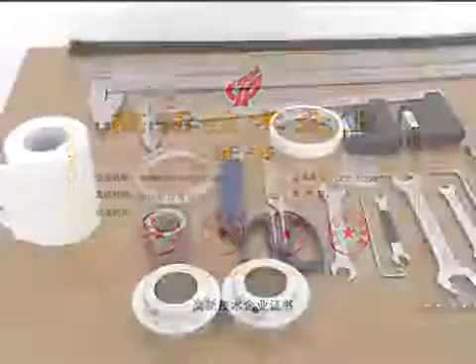This demo contains 3 main parts. Chapter 1, Plotter installation. Chapter 2, Control Center installation and main functions. Chapter 3, After-sale service. Now, we begin from Chapter 1, Plotter installation.

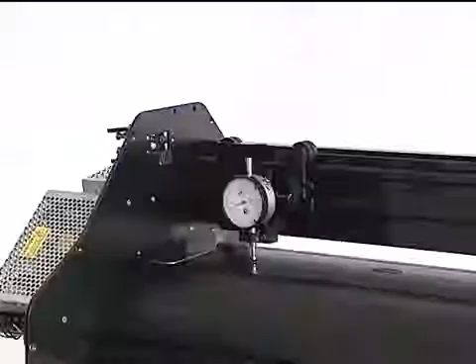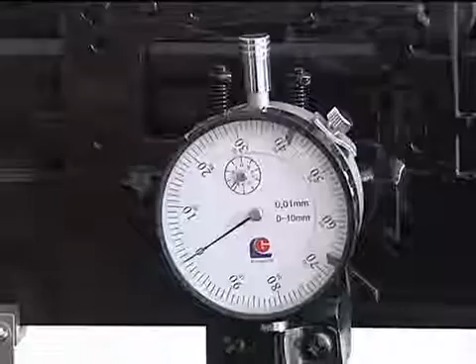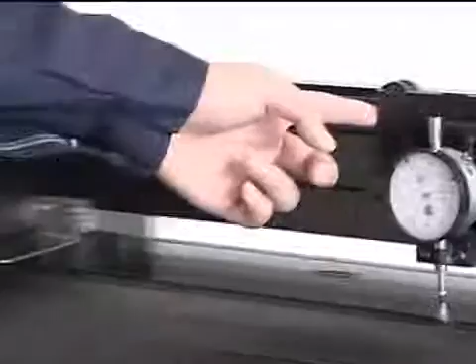Use the calipers to test the parallelism and make sure the bars are in parallel. Take the main beam as reference. The deviation of distance between main beam and take-up bar at both sides should be less than 0.5 mm.

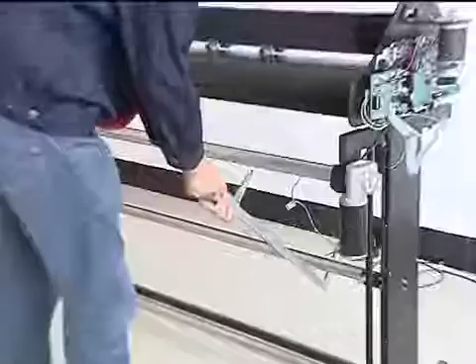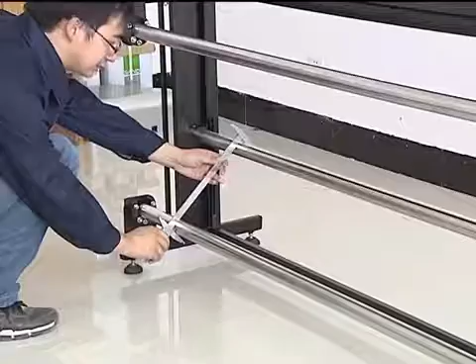Take the take-up bar as reference. The deviation of distance between take-up bar and the connecting bar at both sides should be less than 0.5 mm. Take the connecting bar as reference. The deviation of distance between connecting bar and the feed bar at both sides should be less than 0.5 mm.

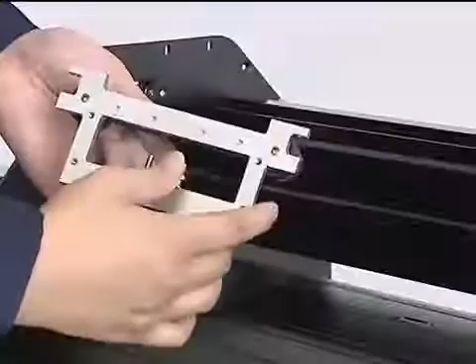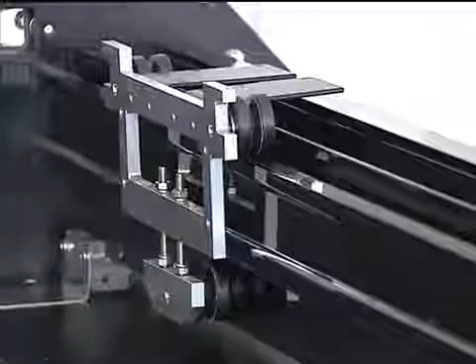Install cartridge device. Install the cable bracket on the cartridge device. Put the cartridge device on the guide. Pinch the up and down ends of cartridge device and tighten the 2 up screw caps.

Adjust the cartridge device. Adjust the 4 screws downwards or upwards to the suitable position. Shake the cartridge device until no big movement. Also use your finger against the wheel and check there is no rotation. Note: this situation means the cartridge device is too loose. This situation means the cartridge device is too tightened.

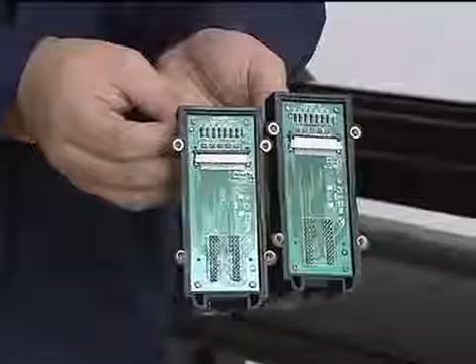Install flat cable. Make sure the flat cable and printhead PCB board is right. Plug the flat cable into the right slot of printhead PCB board.

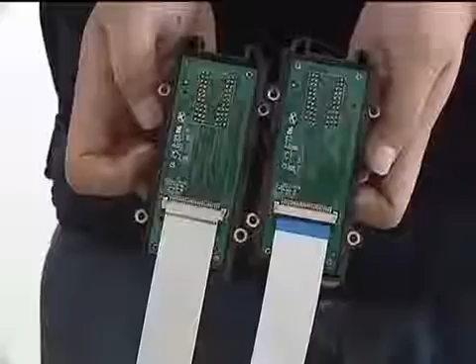Please plug the blue flat cable into the print PCB board A, while plug the white flat cable into the print PCB board B. Printhead PCB board A is in the right position. Printhead PCB board B is in the left position.

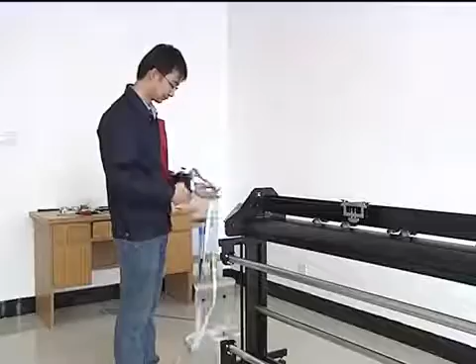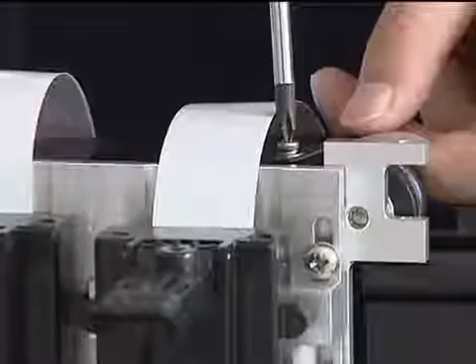Fix the cartridge stand on the connecting board, then fix them on the cartridge device. Fix one side of iron tablet on the bracket and not tighten it at the very beginning. Put the flat cable on the cable board.

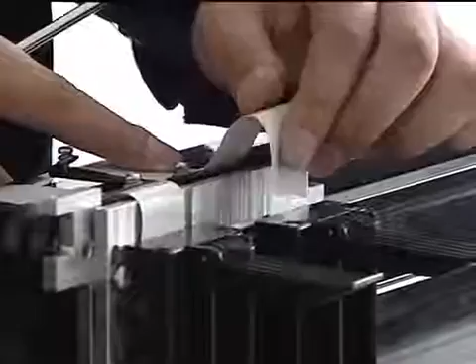Fix the iron tablet and not tighten it. Leave some flat cable to disassemble it when you do after-sale service. Then tighten the iron tablet.

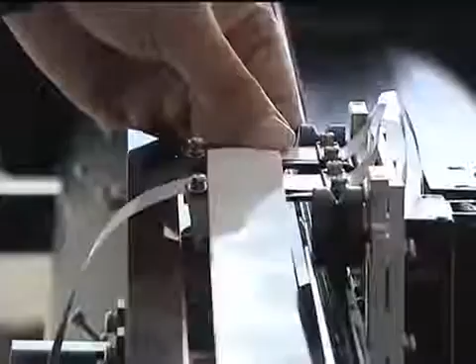Make sure the flat cable is in the middle position of the iron tablet and not crushed by the iron tablet. Fold the flat cable and make sure the flat cable can be put in the middle position of the guide slot, where the grid line is.

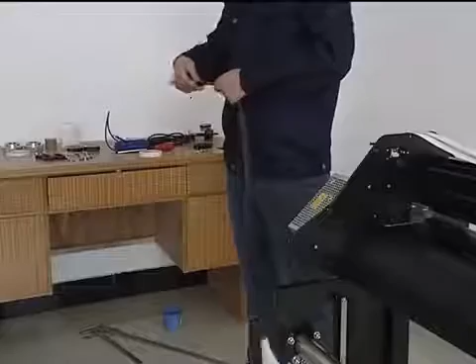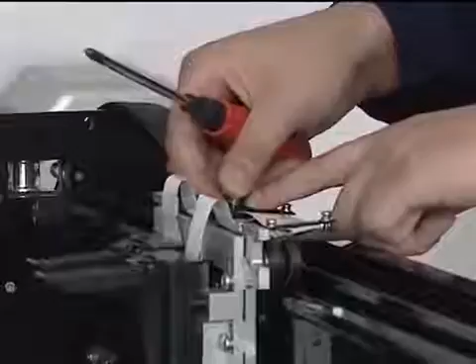Fix on the other iron tablet. Make sure the flat cable should be in parallel with the guide. Then pass the flat cable under the cable board.

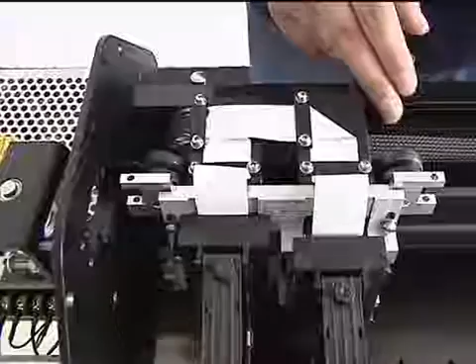Push the cartridge to the leftmost side of the plotter and make sure the cartridge device will not pop up. Stick double-sided adhesive on the guide slot and stick one flat cable on it.

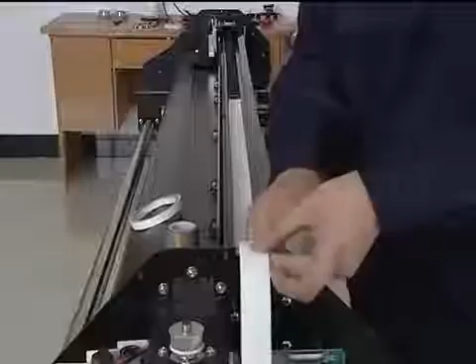The same way to stick the other flat cable. Finally, use a PTFE tape to cover the flat cable.

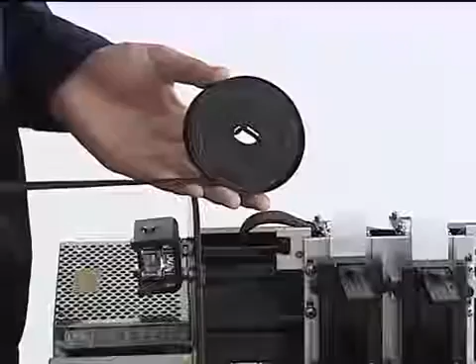Install gear belt. Make sure the gear belt is the right one. Loose the tension device.

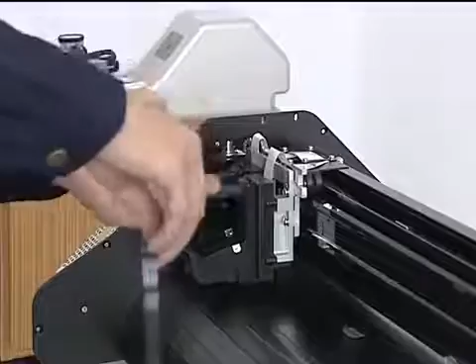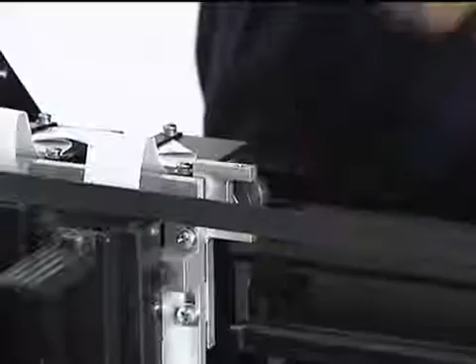Pass from the hole of right plate and Y motor roller. Finally, use the pin roller to fix the other side of gear belt on the cartridge device. Note: make sure the gear belt is not twisted during installation.

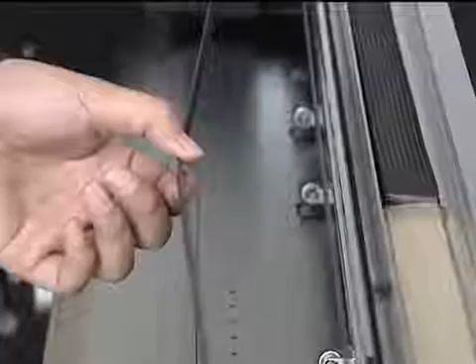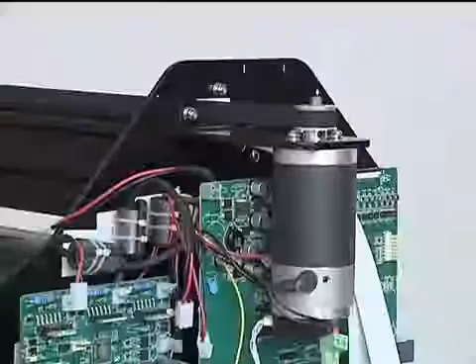Guarantee 3 nuts in the same plane. Pull the gear belt with tension dynamometer and the pull should be 1.5 kg. Finally, tighten the screws. Install the printing PCB board.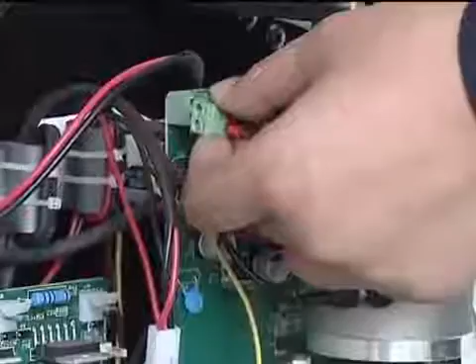Fix the printing PCB board on the plotter. Plug the 15 voltage power socket. Plug the 4-line servo encoder socket. Plug flat cable.

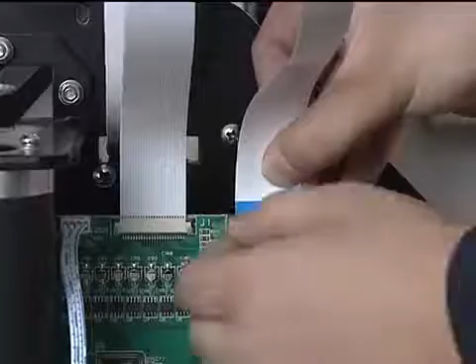Plug 8-line panel cable. Plug 16-line USB cable socket. Install driving PCB board. Fix the driving PCB board on the plotter.

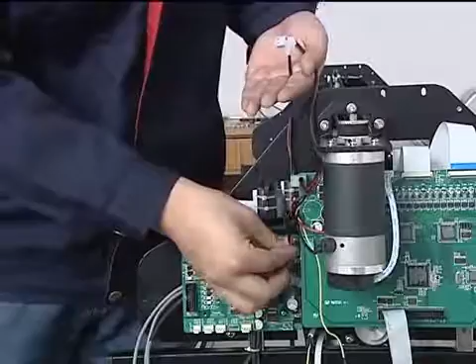Plug the 2-line servo cable. Plug take-up motor 2-line cable socket. Plug feeding motor 2-line cable socket.

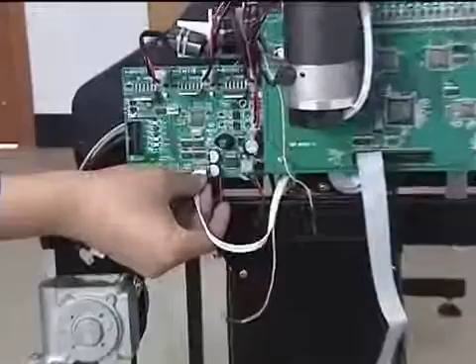Plug sending motor 2-line cable socket. Plug 24 power socket. Plug 4-line speed monitor encoder cable socket. Plug magnetic approaching sensor front.

Plug magnetic approaching sensor down. Plug magnetic approaching sensor up. Plug 16-line USB cable socket.

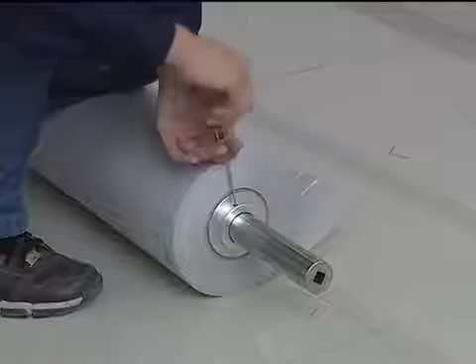Install printing paper. Pass the feeding bar from the paper roll. Make sure the paper roll rotates in counterclockwise direction. Fix the paper roll with paper holder aluminum. Make sure the paper roll is in the middle position of the feeding bar.

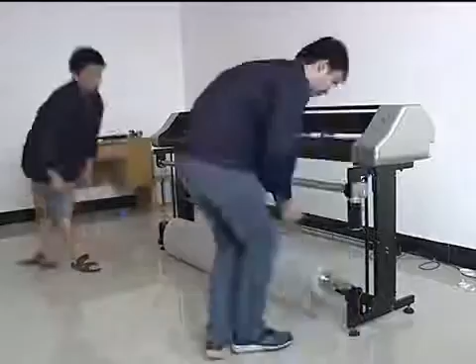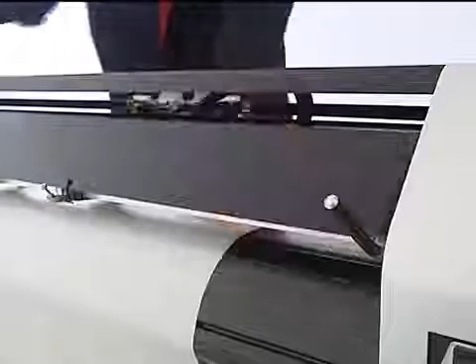Pass the printing paper from the connecting bar and the main beam and put down the handle behind the plotter. Squeeze the printing paper with paper balls at the 2 sides of the plotter.

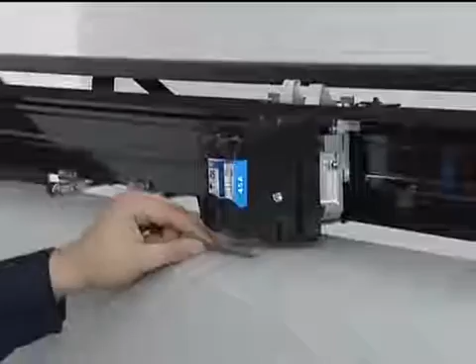Adjust the cartridge stand. The inkjet cartridge was adjusted in the correct position before shipment from our factory, so normally it's not necessary to adjust it again.

However, if you do need to adjust the cartridge device, please loosen the screws and move the cartridge up and down. Keep the distance around 2mm. There is a ruler in our toolbox, and you can use this to test the distance. Note to keep the printhead nozzle surface parallel with the main beam surface while moving the cartridge up and down.

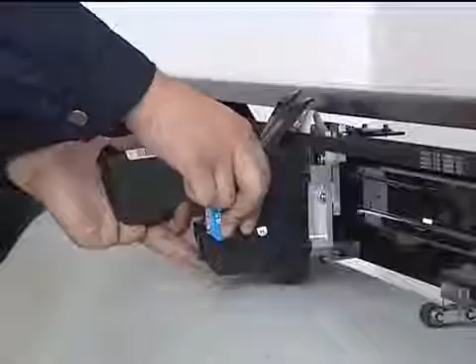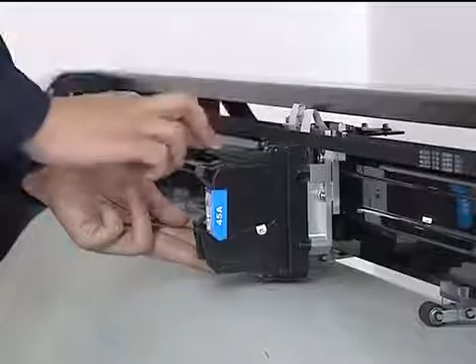Please note the right way to insert cartridges. Turn off the power. Insert the cartridge slowly and gently into the stand and put down the lid. Use the same way to take away the cartridge.

Chapter 2. Control center installation and main functions. First, connect the computer and plotter with a LAN cable. Insert the CD into the drive.

Open and run the dotnetfx.exe file, then install our control center. Follow the plotter setup wizard.

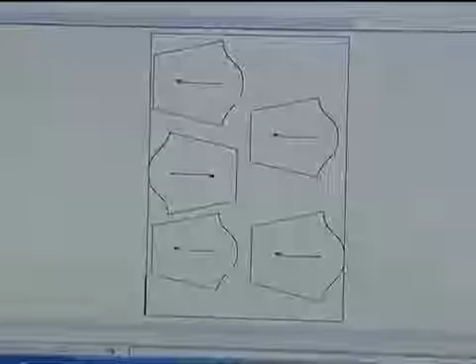Merge: click Merge and then choose some small files. Our control center will arrange these small files together and print them.

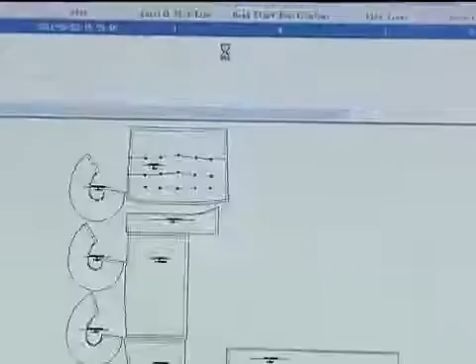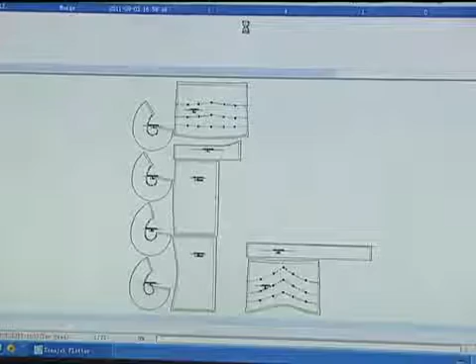Split: for example, the max printing width of the plotter is 165cm, but now you want to print a 1.8 meter file. Then you can use this function. Click Setup, Plot Parameter, Other, File Width, 1.6.

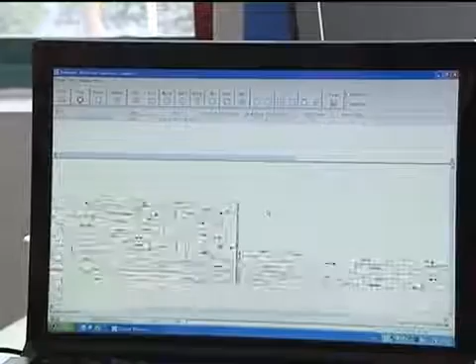Then click Split. Our control center will split the file into two files and print. Also, you can choose a rotate function to rotate the file and then print. Stack the same shape files which are in different sizes together to print.

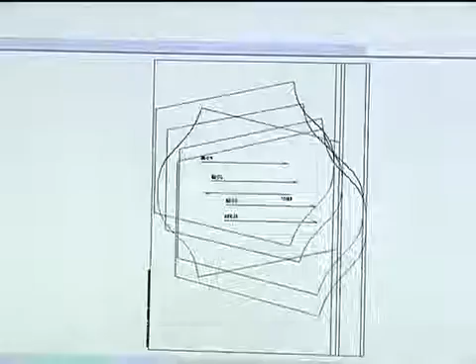Auto plot: all the files will be printed automatically. Auto split: all the files will be split automatically.

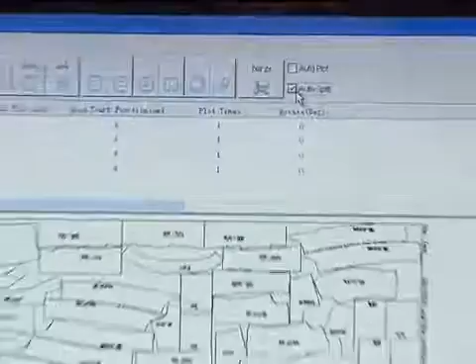Backup: you should back up the plotter parameters on your computer. In case you encounter problems, you can restore the parameters.

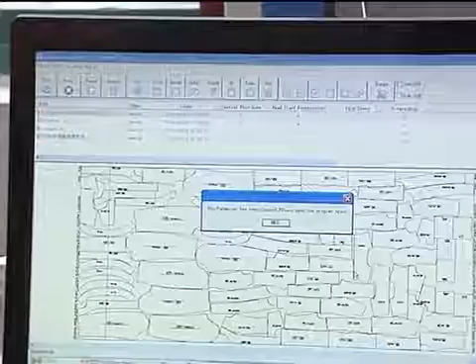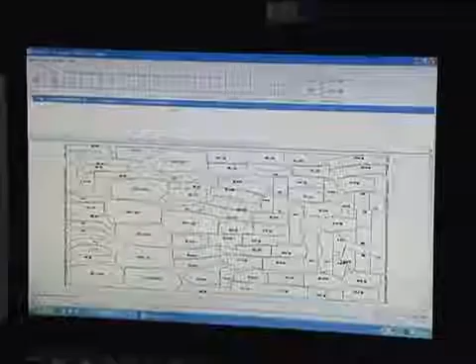In case the plotter stops suddenly while not finished printing, you can continue the file by inputting the lines quantity where it stopped in the initial print lines, then you can continue the print.

Help: you can find the plotter information and manual in the help section.

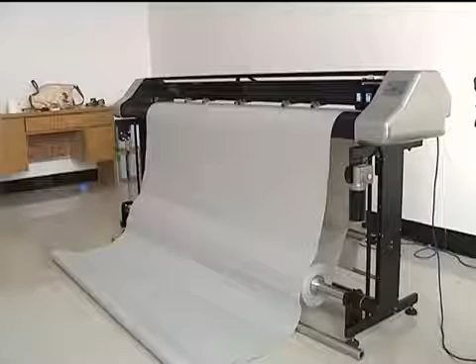Now I will introduce you to the two functions of our PopJet C-Z series. One is the auto feeding option. The other is feeding paper using the take-up bar. Now the first function, auto feeding option.

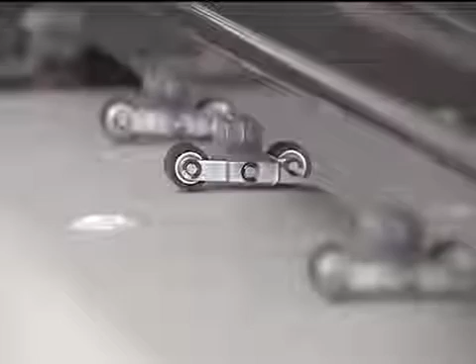When using the auto feeding option, you have two ways to use the plotter. The first one is to print the paper on the floor directly in auto feeding option. Here you need to be careful with the following two points. First, choose the right sandpaper model in the control center.

Second, put down the encoder roller, and also you have to put down the feed paper roller.

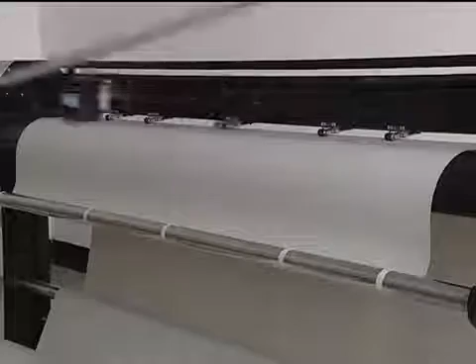Second, tape paper on the take-up bar in auto feeding option. Note, the aluminum tension bar is only used in the front slide slot. The steel tension bar is only used in the back slide slot.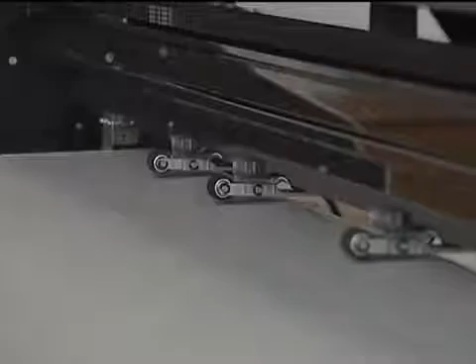Lift the handle at the back of the plotter, so the feed paper rollers will be lifted. Put down the encoder roller. This is very important. Choose the right sandpaper model in our control center.

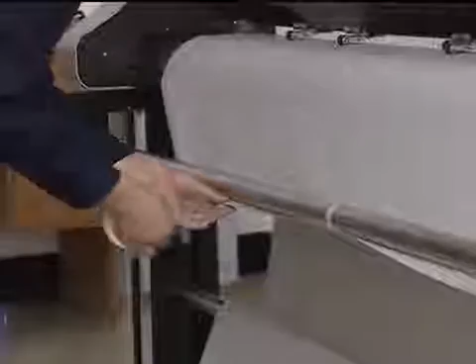Stick paper in the right way on our take-up bar. Keep the paper stretched tight and make sure the edges of the paper on both sides are in alignment. Stick paper on the take-up bar from the middle position to both sides. Make sure the paper is smooth and tight.

Chapter 3. After-sales service. Here, after-sales service contains two parts: adjustable problems in the control center, and unadjustable problems. First, adjustable problems.

Accuracy calibration. Calibrate the accuracy of the change paper roll because sometimes the paper thickness is different, so you need to adjust the accuracy. Use CAD to draw a 1x1 meter file and print it.

Measure the actual data with a ruler and input the data in the control center.

Click Save. Our control center will calculate automatically the bidirectional printing adjustment.

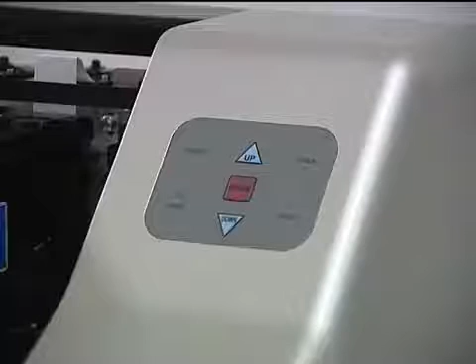First, if the cartridge device stopped during printing and the position is arbitrary, can be here and there, push the cartridge device to the middle position and check whether it can go back to the start right position. If it can go back, that means the Y model may have some problem.

Second, in case the print speed is very slow and the plotter stopped at any position, maybe 2 control centers are in operation.

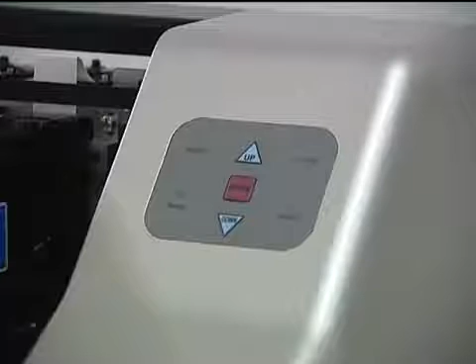Third, in case the plotter gives an alarm every time you click plot, there is something wrong with the printing PCB board. Or if the plotter gives an alarm signal during printing while stopping at the same position, there is something wrong with the printing PCB board.

Fourth, when you turn on the plotter, the cartridge device cannot go back to the start position. Maybe something is wrong with the printing PCB board or the driving PCB board.

Alarm signal is on every 0.5 seconds. There may be 7 reasons.

First, check whether the encoder roller has been put down or not. Second, something is wrong with the driving PCB board.

Third, check the control center settings. Fourth, speed monitor problem. Fifth, in case the plotter gives an alarm when beginning to print, please check whether the setup is right or not in the control center, and whether the control center version is right or not.

Sixth, wire models problem. Seventh, printing PCB board problem.

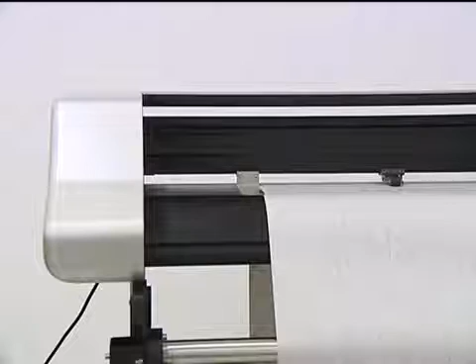The lines are deviated more and more seriously during printing, and the cartridge device hits the plate. There may be 2 reasons.

First, the gear belt is too loose, please tighten it. Second, the wire model is damaged.

Print ink looks abnormal. There may be 4 reasons. First, please check whether the cartridge is damaged or not. Second, check whether the printing PCB board is damaged or not.

Third, check whether the printing head PCB board is damaged or not. Fourth, check whether the flat cable is damaged or not.

Paper feeding cannot stop, or when you turn on the plotter, it does not feed paper. There may be 3 reasons.

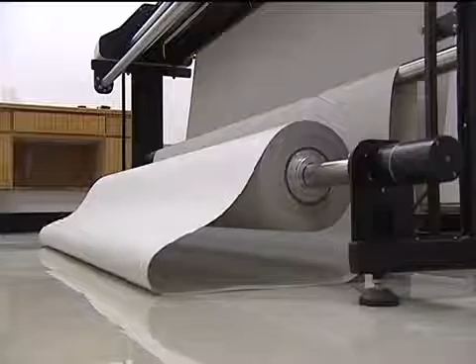First, please check whether the sensors are damaged or not. Use a metal object to close the sensor. In case when you approach it, the LED is on and darkens when you take it away, that means the sensor is okay. In case the LED is on all the time or not on at all, that means the sensor is damaged.

Second, the driving PCB board is damaged. Third, the feeding motor is damaged.

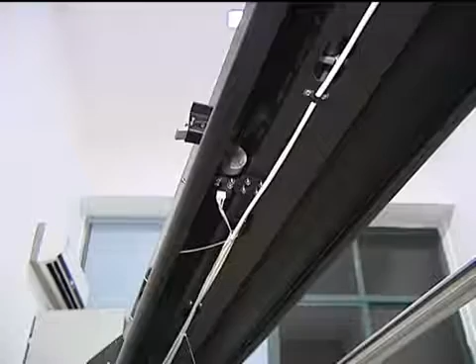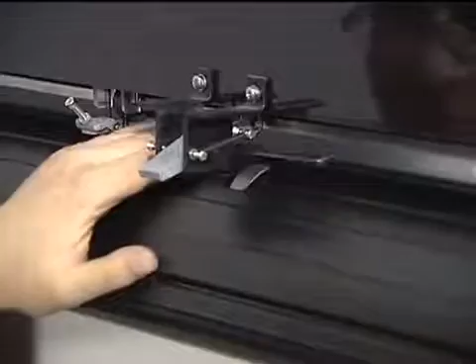How to replace the speed monitor: First, loosen the screws and adjust the speed monitor. Make the monitor's roller 1 mm higher than the main beam surface. Second, after installation, check whether the monitor roller is flexible or not when rotated.

For the ways to replace the PCB boards, models, gear belt, or flat cable, please take reference in Chapter 1.